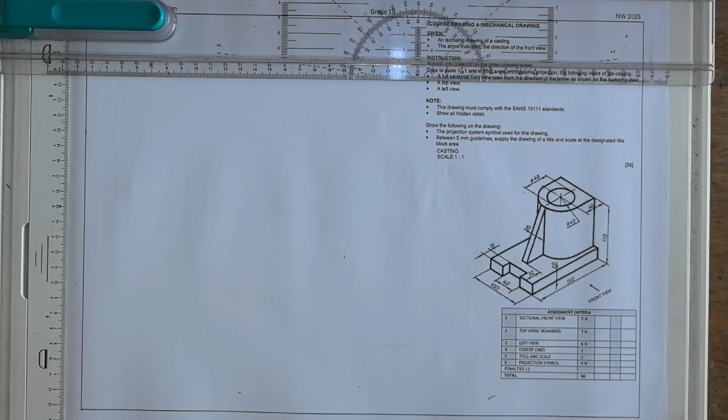Alright, let us look at the problem that we are given here. This is course drawing number 4, mechanical drawing. We are given an isometric drawing of a casting, arrow indicating the front view. The scale here is supposed to be 1:2. So this scale here is a reducing scale, so it means all these measurements here we're going to divide them by 2. Let's quickly do that.

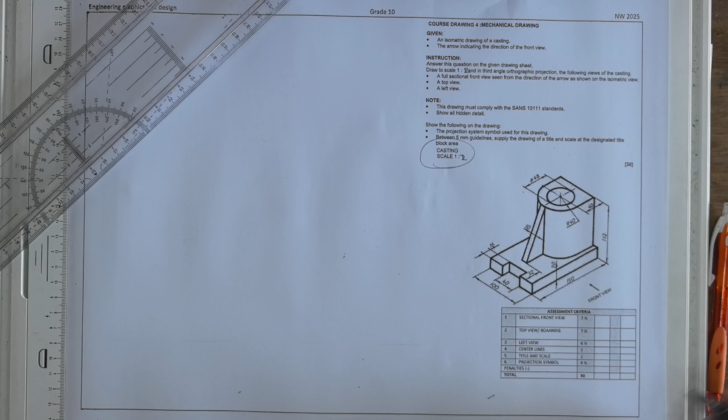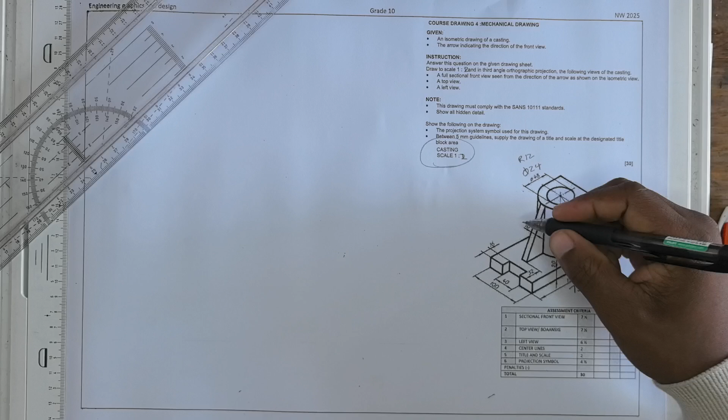For this one, this is 75, this is 56, this is 20, radius 20, this is diameter 24, then it will give us radius 12, and then this is 5, this is 8, 20, 50, and 10. This one here is 26. With that given, let's start.

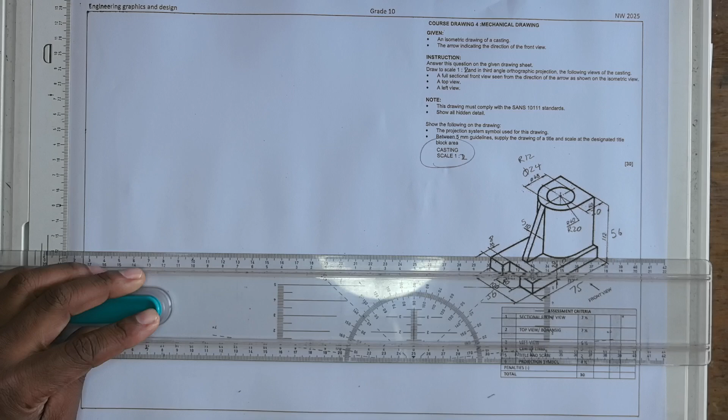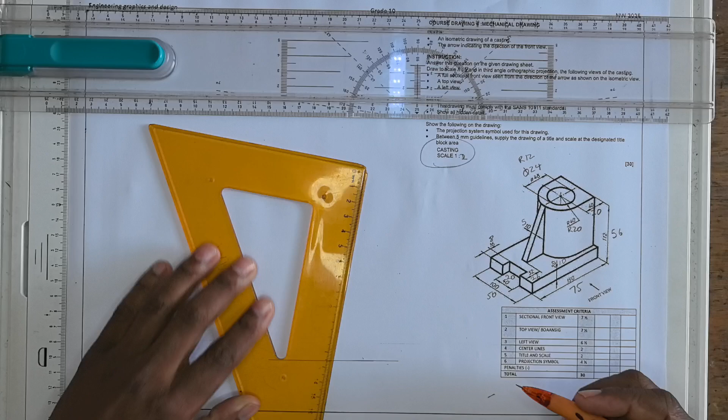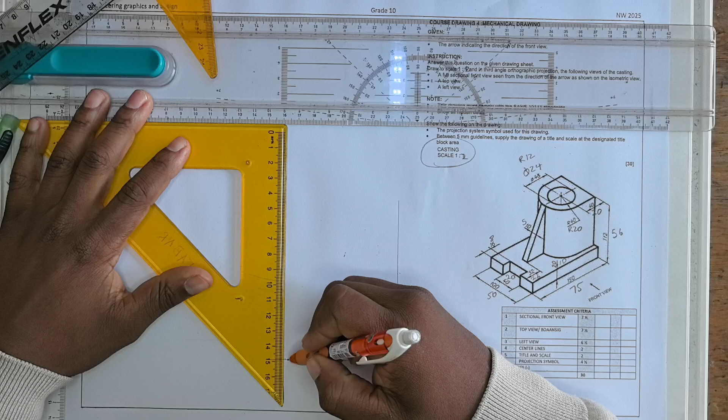They want us to draw the front view, so we're just gonna start with the drawing here. For the front view, we're going to draw this section here. So it means the height is going to be 56, the length is going to be 75. So I'm gonna start at the bottom here. With this line, and just gonna construct this one as well. Then I want 75. So it's gonna be 75 right there. Then project again. This small height here is given here, it's 10.

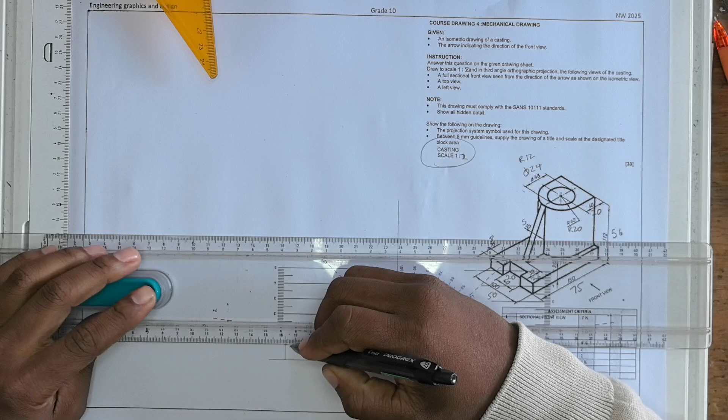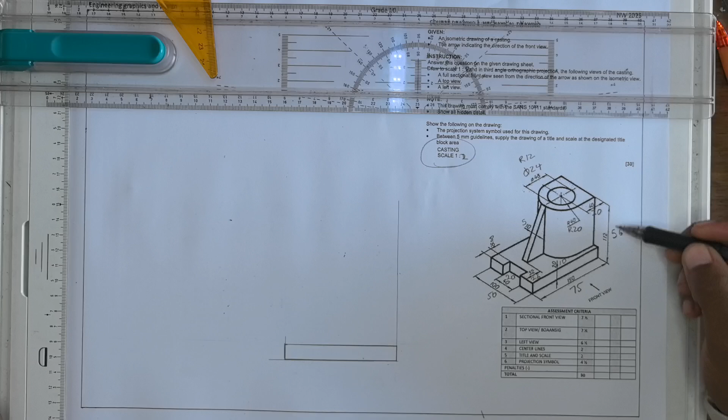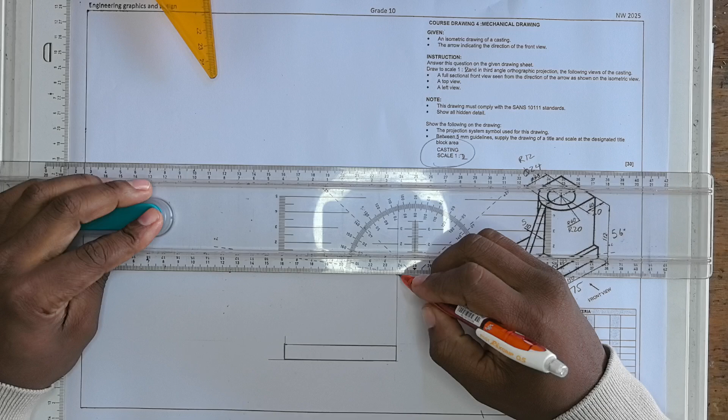So we are doing the bottom. So that's that bottom part there. Right. Now let's get in the big height. That height is 56. So from here to here, we measure 56. From the bottom to the top, measure 56 millimeters, like that. Draw this line in construction, nice and light.

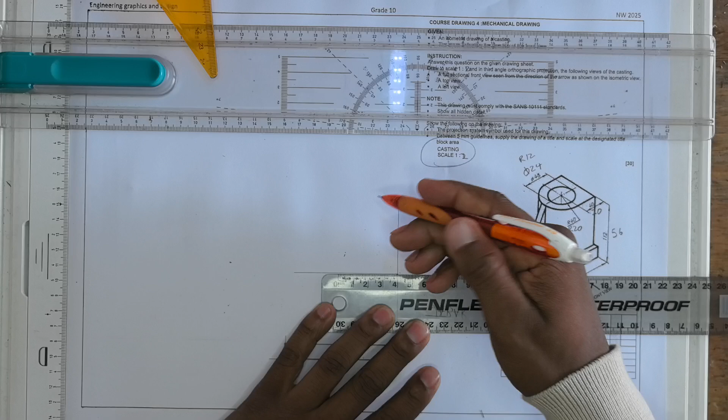Then to get this section here, you're first gonna measure 20, then you're going to measure radius 20, because the radius of this outside arc here is 20. So it means we're gonna measure 20, then 20, which will make it 40. So that's the first 20. That's the second 20. That gives us 40. Then we project it down. Project this down, and on the first 20 here, we're gonna draw a chain line. Alright, that's the chain line.

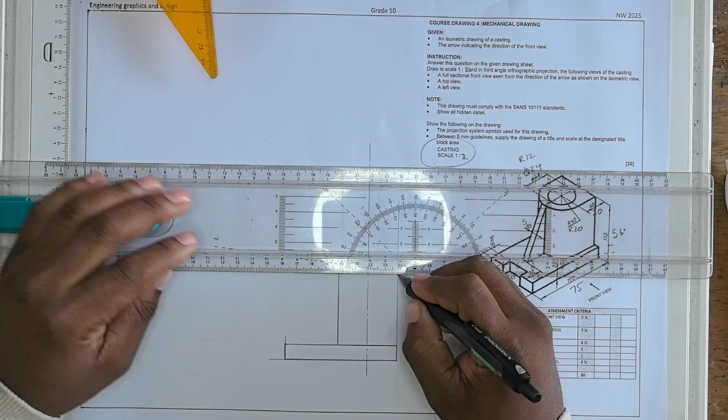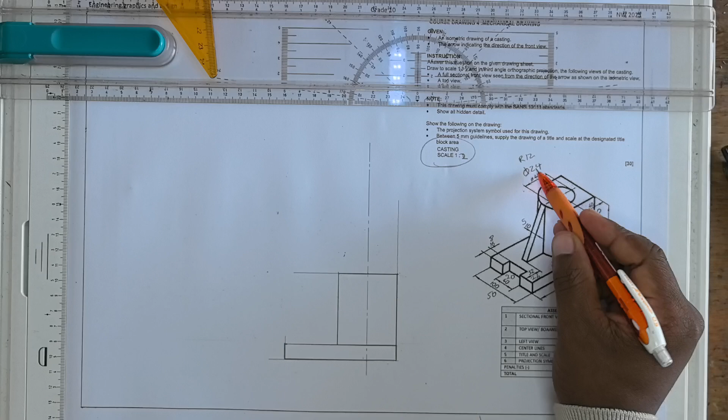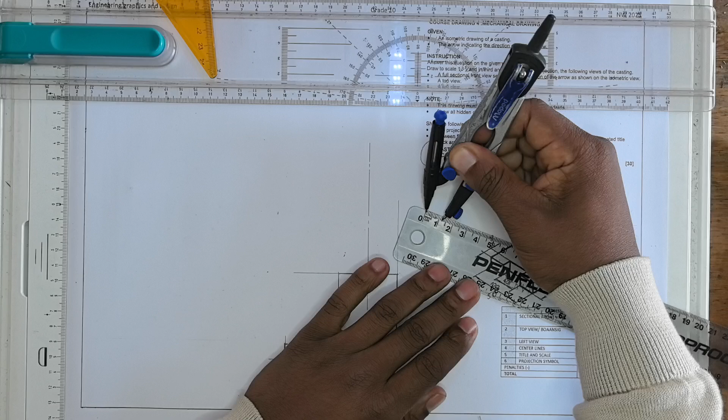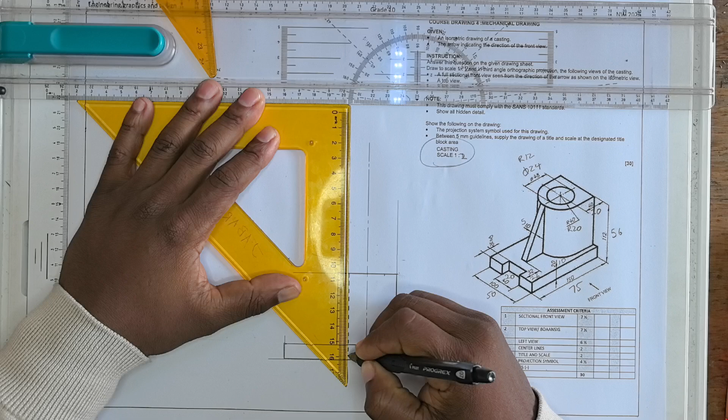Alright, then the next step now is to draw this circle. Since from the front view you're not going to be able to see it, it's going to be hidden detail going down there. So we're going to take the measurement for the circle. We're given the diameter of 24, and then we divide by 2. It's going to give us the radius of 12. Let's measure the radius there. And draw your hidden detail. Alright, this part is done.

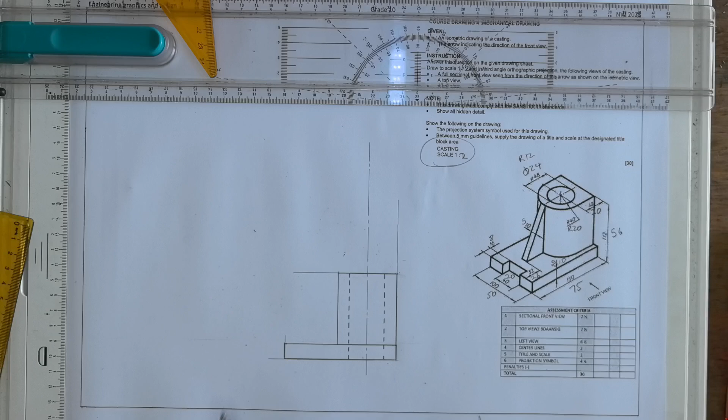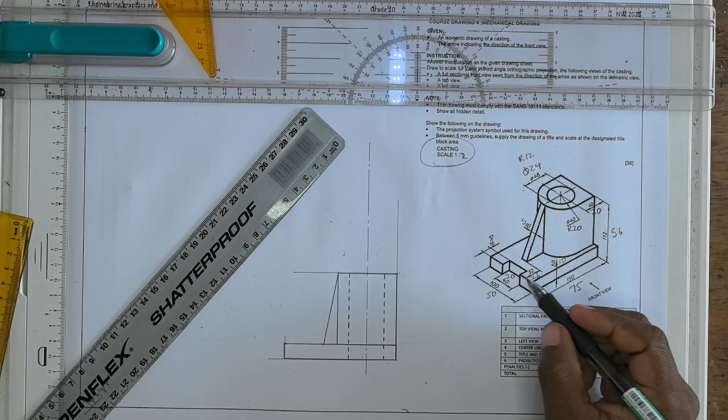Now we need to put in the slope. You see the slope here from this edge going there, the slope is 52 millimeters, which is 26. So it means from here to here you're going to measure 26 millimeters. That's 26 millimeters. Then we're just gonna join this point with this one. The first thing, you measure 26 from here to here. Then from that point, just join this point and this corner there. That's your slope.

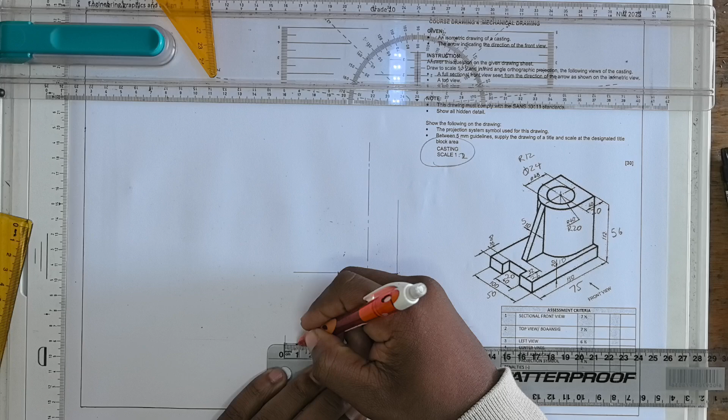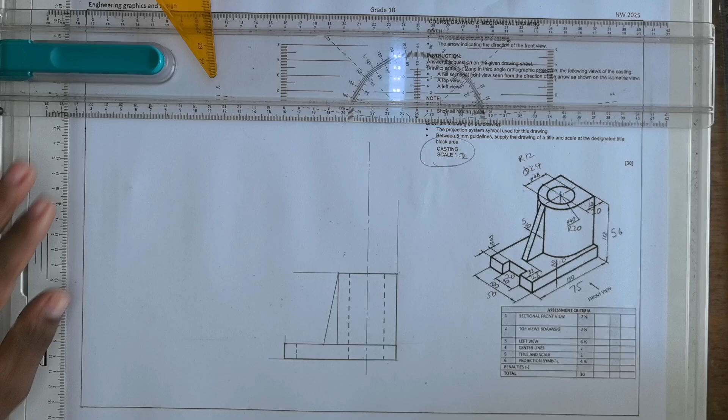Then we need to put in this small groove here. The measurement of that is 16, which is 8. So we're going to measure 8 from this corner inside. It's gonna be 8. It's also going to be hidden, so we're gonna draw it as a hidden detail. Alright. With that being said, our front view is complete. So let's continue to the top view.

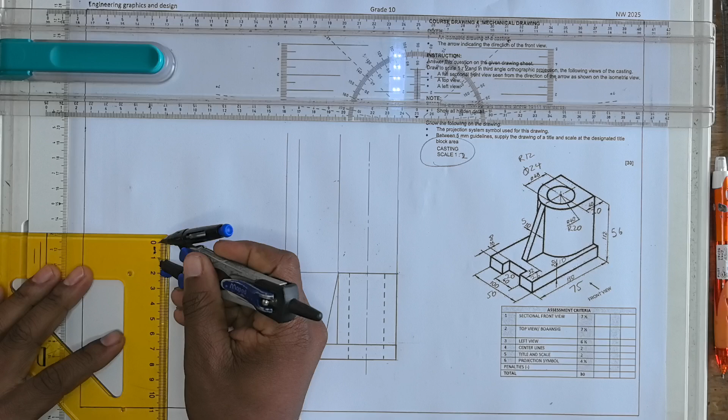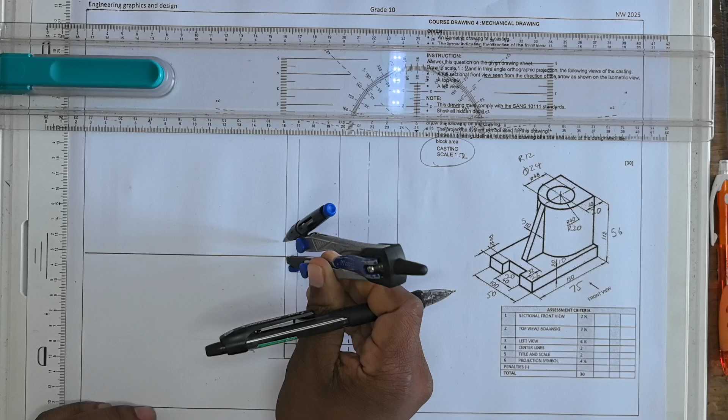Project all the corners, project them up. From here, measure 10 millimeters. Measure 10 millimeters. Draw your reference line. Measure another 10 millimeters from your reference line up and also to the side. Draw your second reference line right there. Then where this 10 millimeters here is where your top view is going to start. Top view is going to start there.

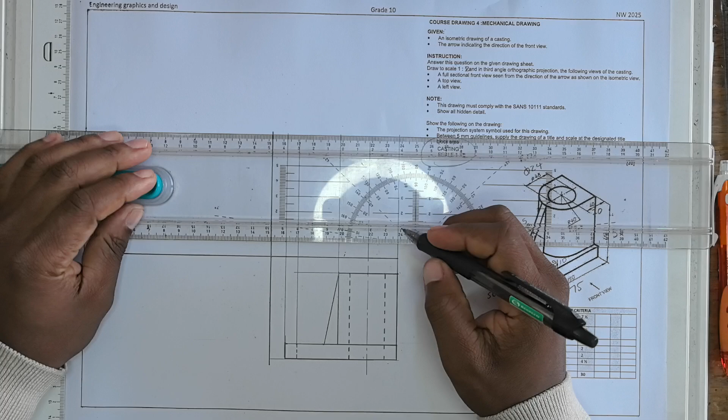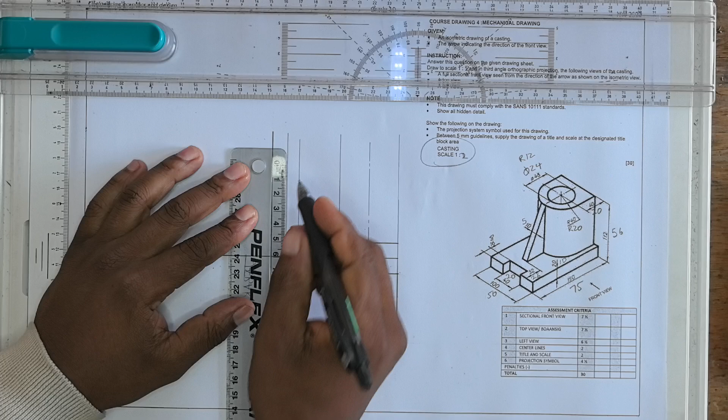So the length of the top view is the length of the front view, and then the height of the top view will be given by this measurement here, this 50 here. So from here going up there, we measure 50 millimeters. Then you can just darken everything. Also this line, make it dark.

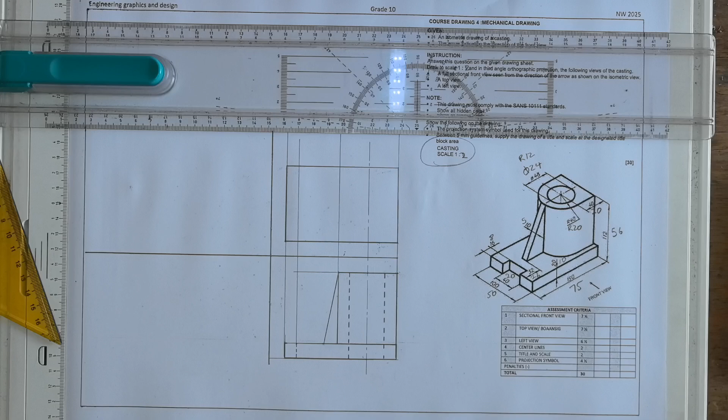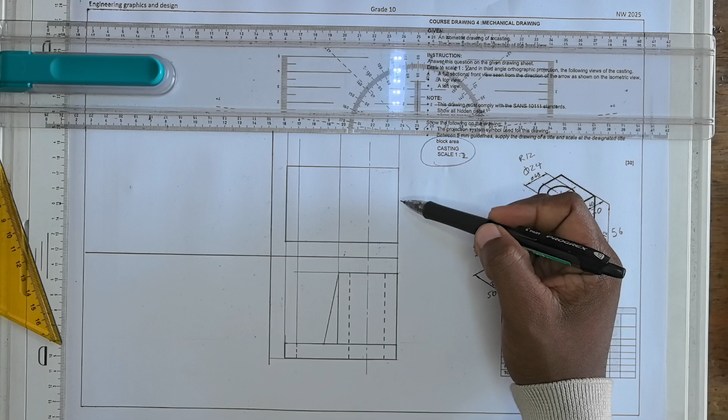Then when you look at the top, you're gonna be able to see this arc here, then we'll see this circle. So for us to be able to draw this arc and this circle, we need to get this chain line here. So to get this chain line, we need to find the center from here to here. We need to find half of this line. Since all we know is 50, half of 50 is 25. So we're going to measure 25 millimeters to get to that point. Measure 25 millimeters, then draw your line.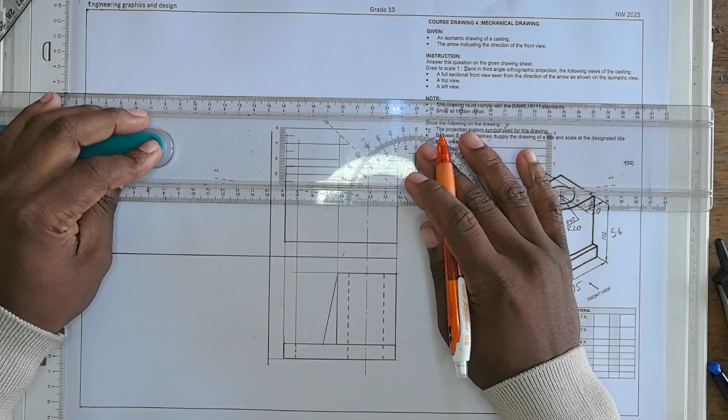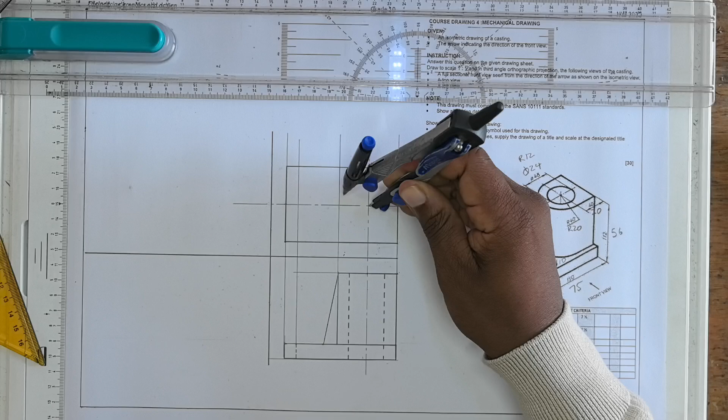Then from here we're going to do this arc. This arc is given by a radius of 20. We know that we've already measured 20 here, so there's no need to measure again. Just take this 20 here and draw this arc. It starts here and then it's going to end here. So draw it in there. And the last part of it, which is this part, just extend it with your T-square.

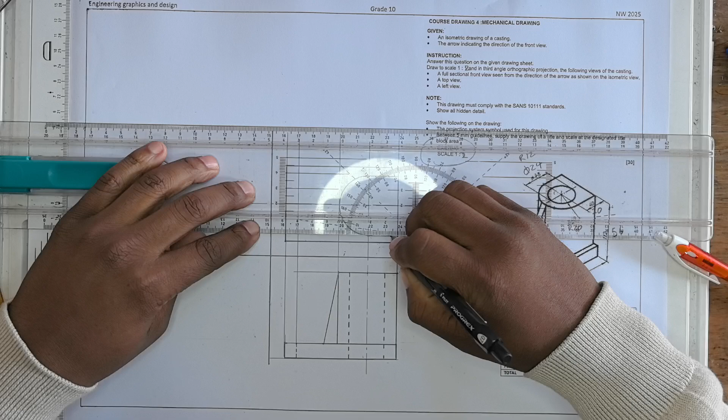Just like that. Then we're just gonna do the circle. The radius of the circle we know is 12, and we already measured 12 here. So we're just gonna take this measurement here and draw that circle. Okay. Let's just make our circle dark.

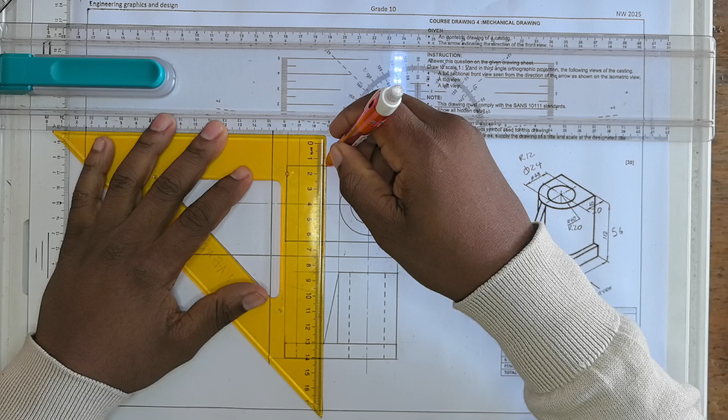Okay, then we're just gonna need to put in the slope, or we need to project this line for the slope here. Just project this up for the slope. And then we know the thickness of the slope is 5. So it means that from here, we're going to measure 2.5, 2.5. So measure 2.5 on your compass.

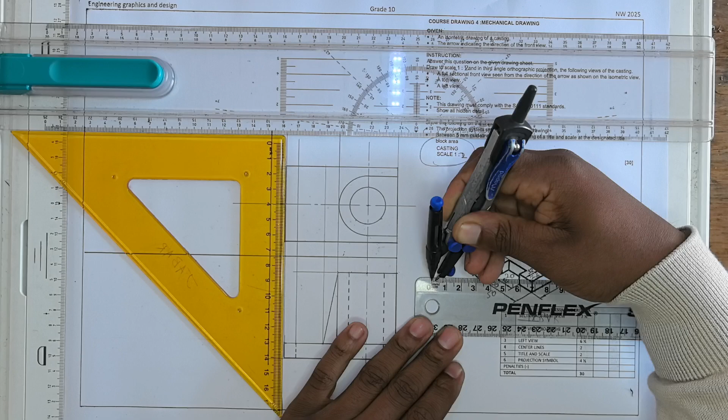It's gonna be 1, 2, just past 2 there. Small past 2. Then take that measurement on your compass. Then make a mark there. Flip your compass, make another mark. That's where our slope is gonna go.

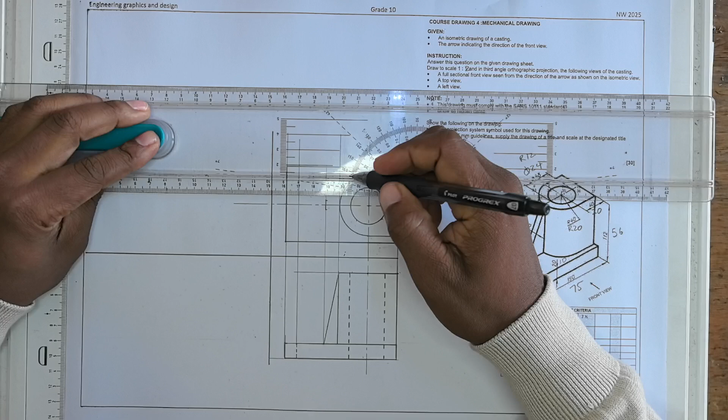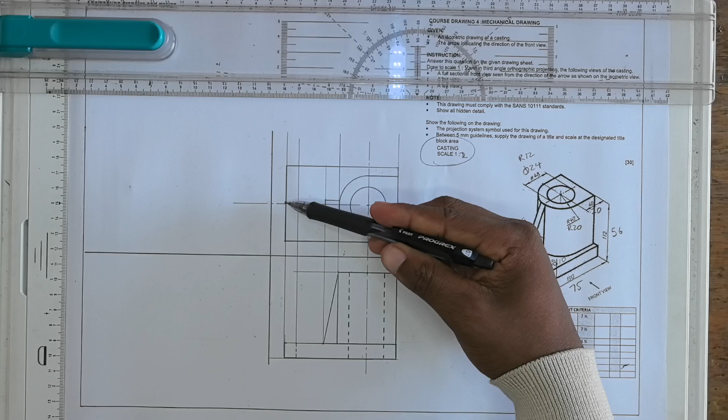That's the slope. And we need to put in this groove because from the top view we'll be able to see this space here. So we are given the space here as 20 millimeters. So if the space here is 20, it means this side is 15, this side is 15. So we're going to measure from the center half of 20, which is 10. And then just plug it there. Measure 10.

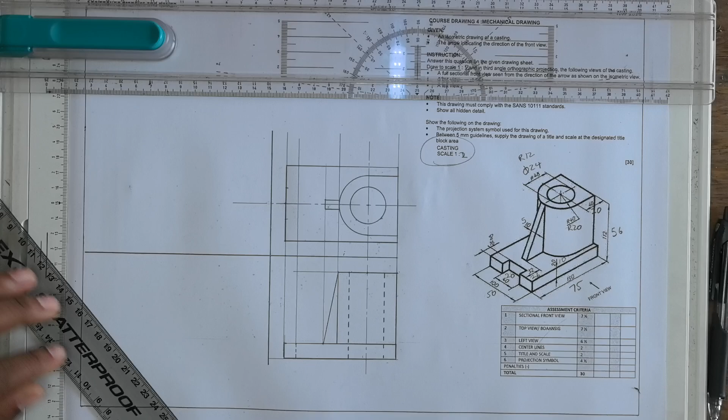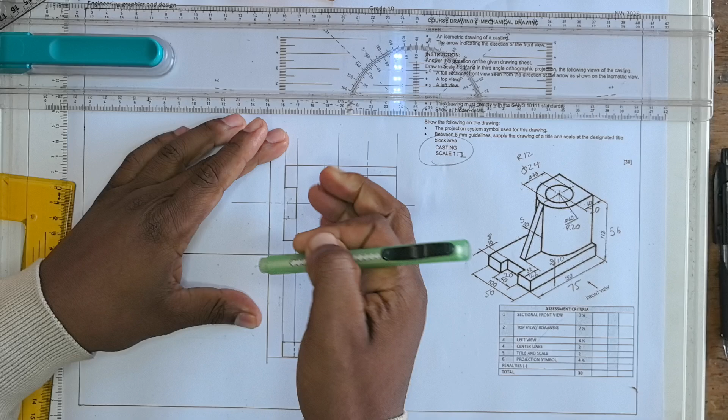Then from the center here, make a mark. Then that gives us this slope here. Alright, erase this part, it's not there. So that's the top view.

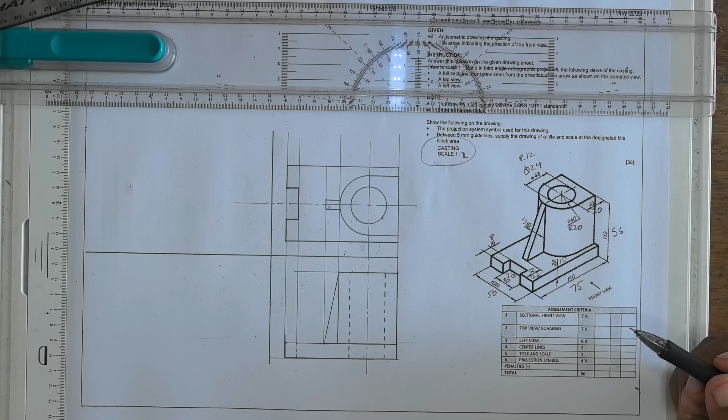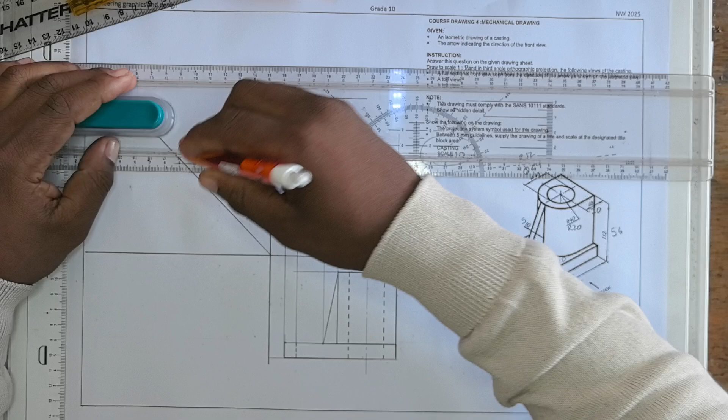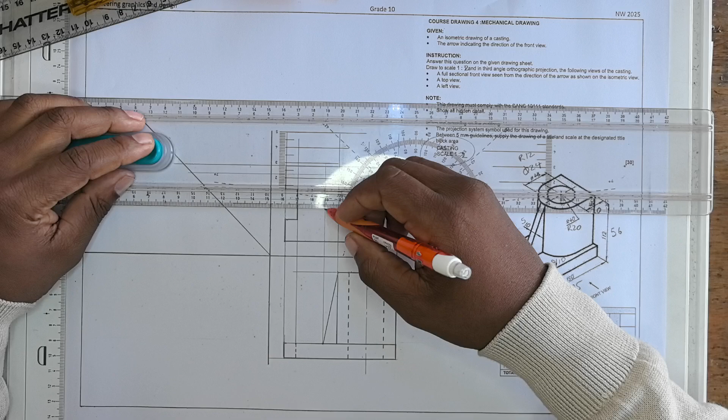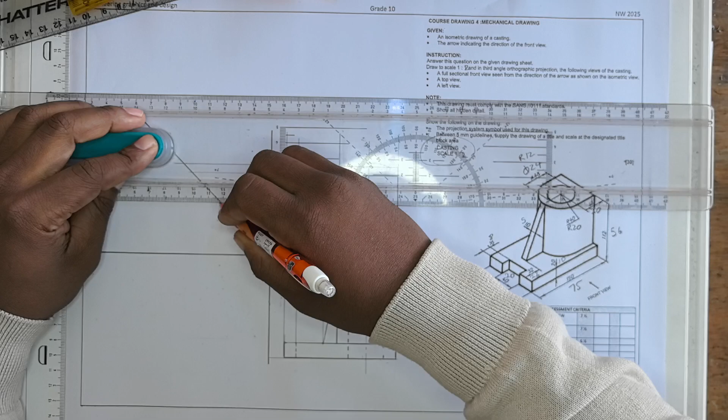Top view is done. The next step is to take your 45-degree set square, put it there, draw a 45-degree line. Project it going this way. Project all the corners again towards your 45-degree line. Project all the points. All right, and this one as well. Remember, after they touch your 45 degree, then you bring it down.

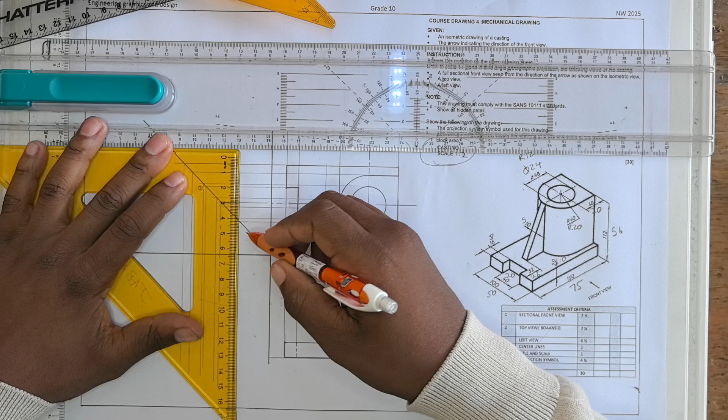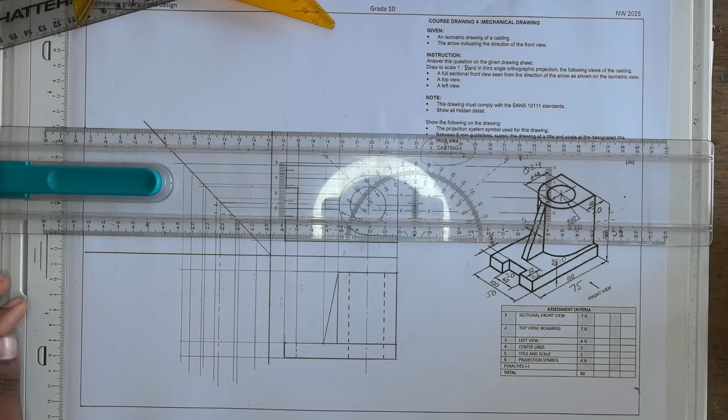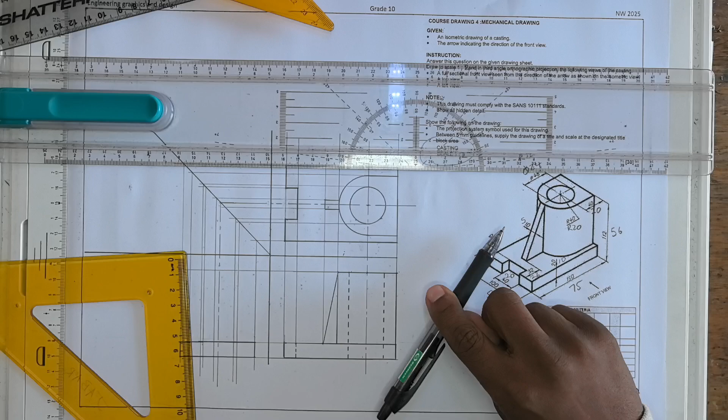All right, and after that you're going to project all the corners here as well. So we're gonna project this way. Like that. Then let's highlight what we have. Let's start at the base. We have the base. Then we are doing this view here. You have this base, so you'll be able to see this groove here. It's this one. Oh, I forgot to project this one here. It needs to come down this way.

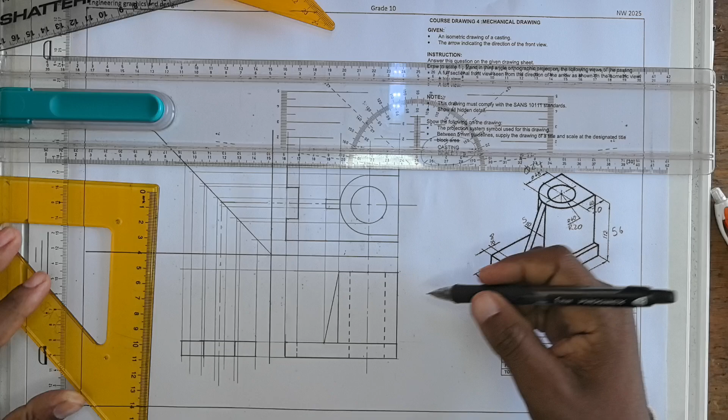So this groove is this one, and this one here. Follow it. It's here. So you're gonna make it there, and we see this top part, this one. I also need to project this line. I skipped it. So from the top we're gonna see this as well, and this one you're gonna see it.

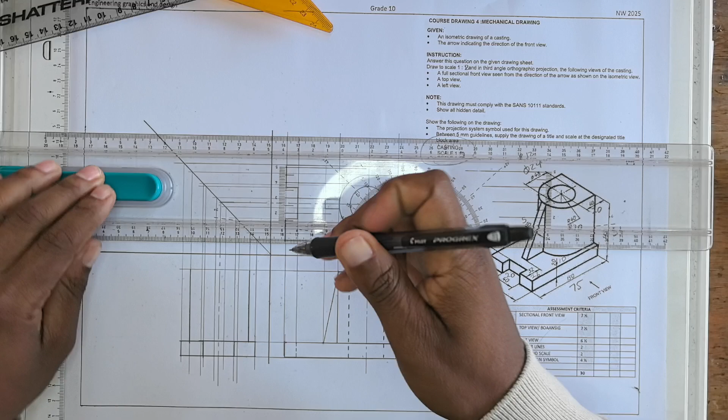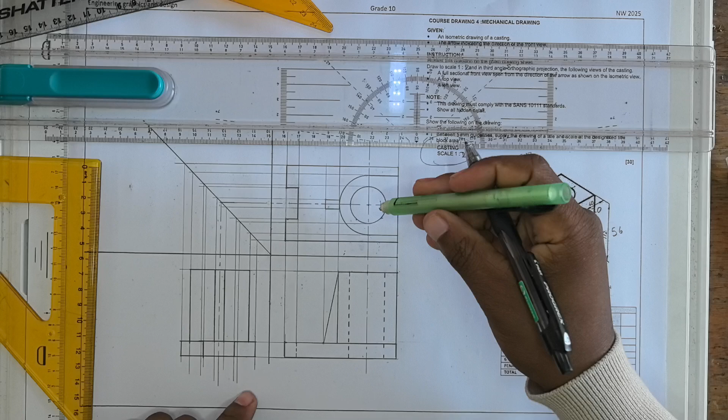Then from this side you'll also be able to see the slope here, which is this one. Then remember, we still have this circle inside, so this circle will still be hidden detail. It's this one here. I'll follow this line, it's this one. So it's still hidden detail. The other point is this one.

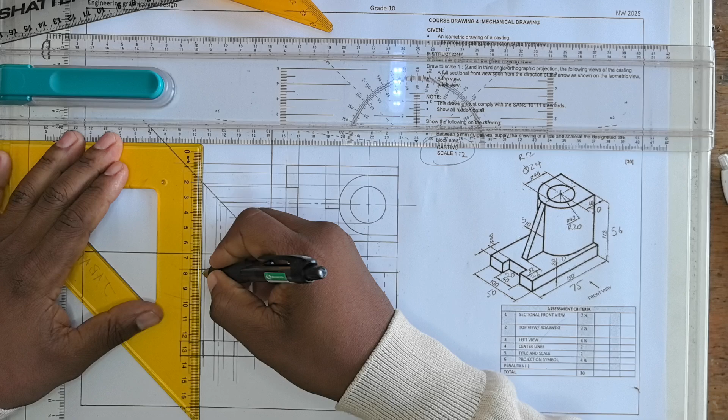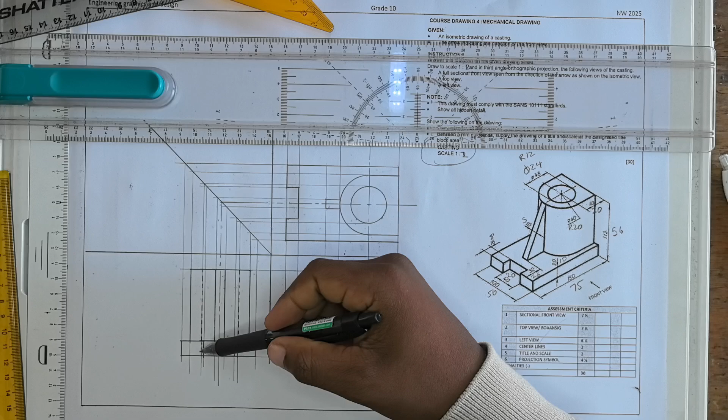All right, what do we have? All right, we have that circle is hidden detail. We have the slope is there. We have this part, this groove is here. These two parts are here. So when your drawing is like this, it's complete. But remember, we have marks for scale and title block. So let's quickly do that.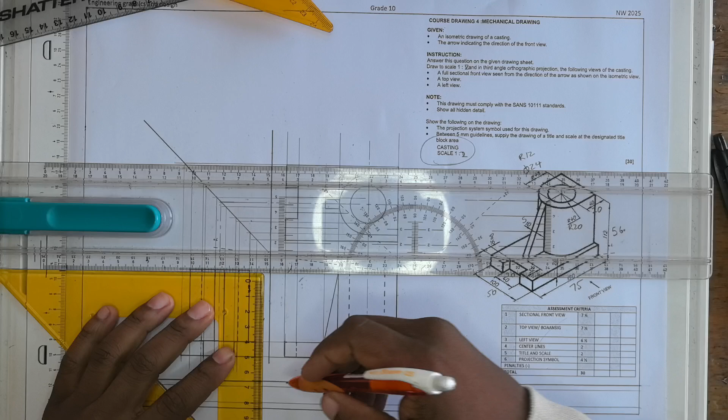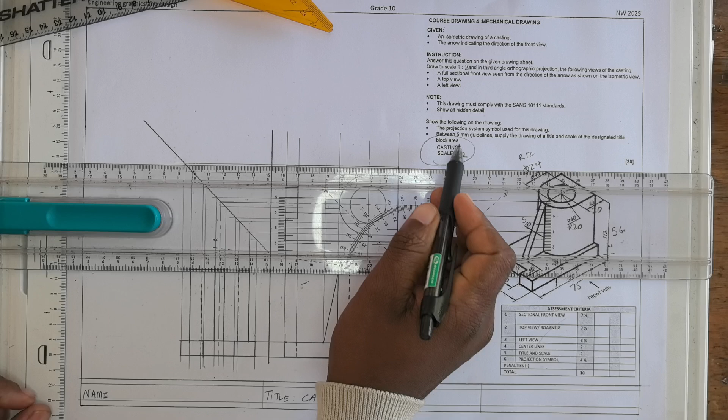Okay. You know, here is gonna be your name, and here you're gonna have your title. Title of this drawing is casting. There's a mark for that. Yeah, there's the title and the scale is there. Scale is 1:1. You can put your grade here, and then on the next one you can do the date here.

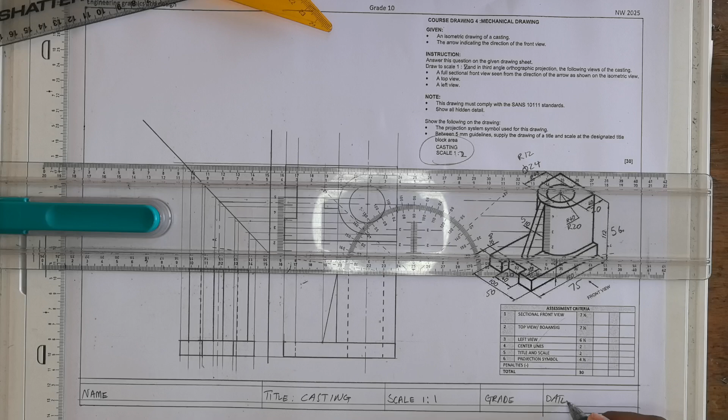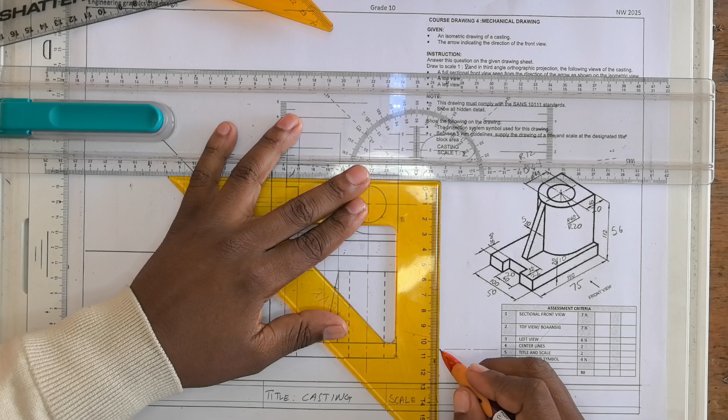The most important part is the title and scale, because there's marks for that, and also the projection symbol. This is a third angle orthographic projection, so the symbol will be like this. So you can measure. For a small circle, you can measure 4 millimeters.

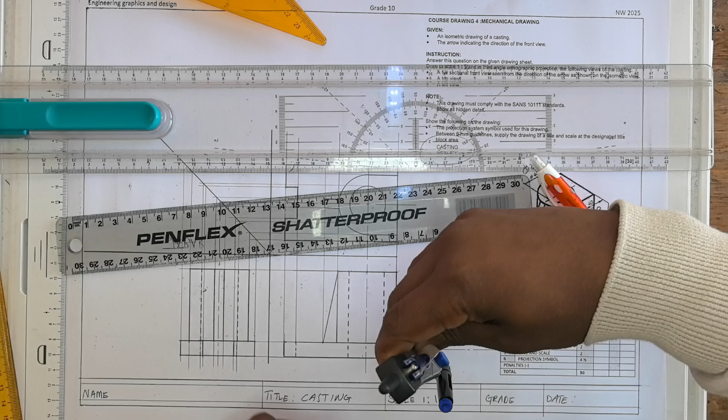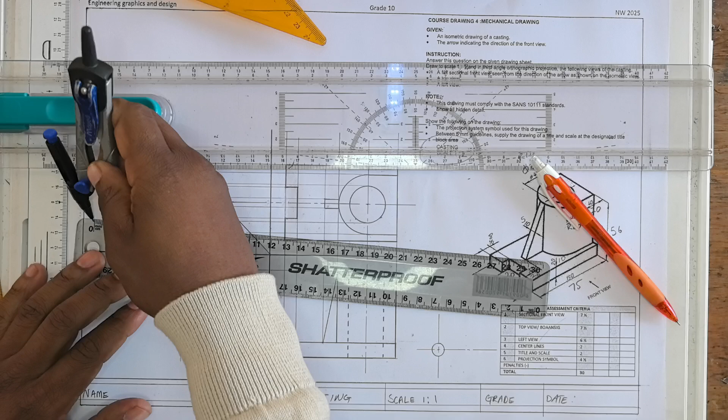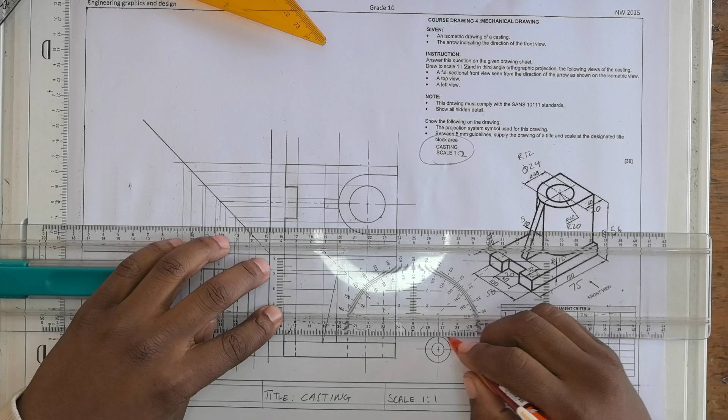And then you can measure 8 millimeters for the big one. After that, project the tangent. Project this highest point like that with thin construction lines, thin and very light.

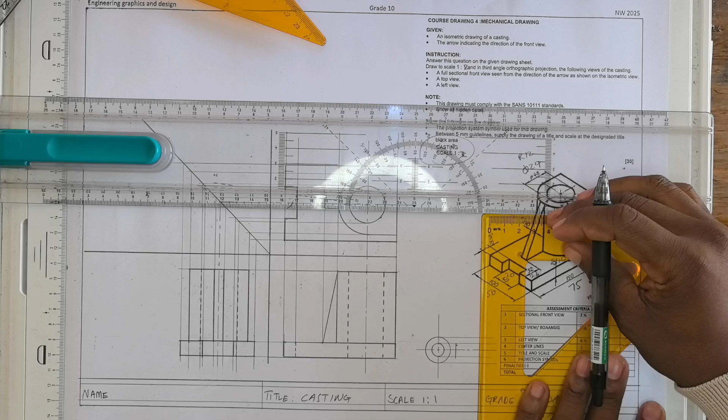And you can finish your symbol by joining this circle here. You see this line for the small circle? Just join. For the big circle as well, just join them. Any measurement is right. I only want to see the symbol. Then you can join this one to this one, finish up your cone. There. And once you've done it like this, you have this for the projection symbol.